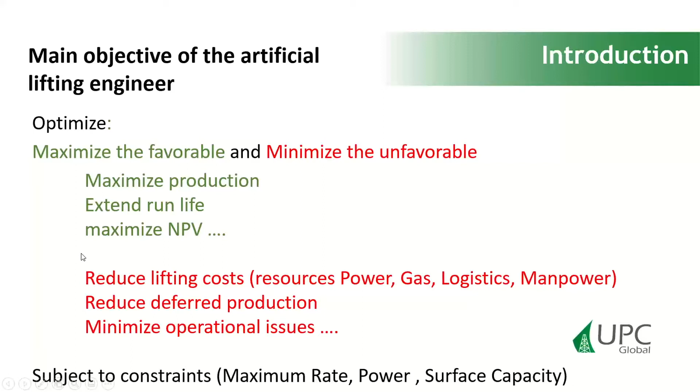If you talk about optimize with a person from drilling, the meaning for them is completely different. But here, what I want to highlight is that we want to maximize the good things and minimize the bad things. That means a lot of things. Sometimes we only think about production. That is valid, but please keep in mind that the definition can be extended for the better profit of the company.

So to achieve this optimization goal, we need to monitor the wells, and a monitoring program can be manual or automated. It doesn't matter. What you have to do is identify opportunities, detect anomalies in the lifting system or in the well or in the reservoir, quantify the performance of the lifting equipment, quantify the well or reservoir performance, and avoid operating in unsuitable conditions for the lifting system or the well or the reservoir, because that will reduce the life of the artificial lift system or the life of the reservoir. We need to identify and correct failures.

This list of activities, and maybe some others, you have to do in the field. It doesn't matter if it's automated or manual, this is what you have to do to achieve the optimization goal, to increase the good things and reduce the bad things.

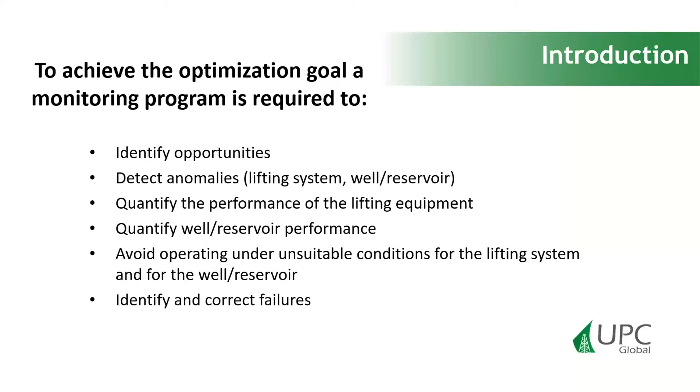So what should the surveillance program do? If we have a system, manual or automated, we have to monitor the artificial lift operations and the reservoir performance. We have to have fast operational actions. I mean, if we discover that we have to increase the pumping speed, or increase the injection gas rate, or shut in a well, whatever it is, these actions have to be performed very, very fast.

We have to determine the artificial lift run and off time, what we call the availability, the well availability. 90% of the time the well was producing, 10% it was offline. We need to do that.

We have to generate reports with key performance indicators, KPIs, and trend charts. That's important, of course. We have to store the artificial lift systems' run history. Sometimes it's not only the production history that's there, but we also need to know what was the sequence of artificial lift methods and the specification of the equipment that you have in the well.

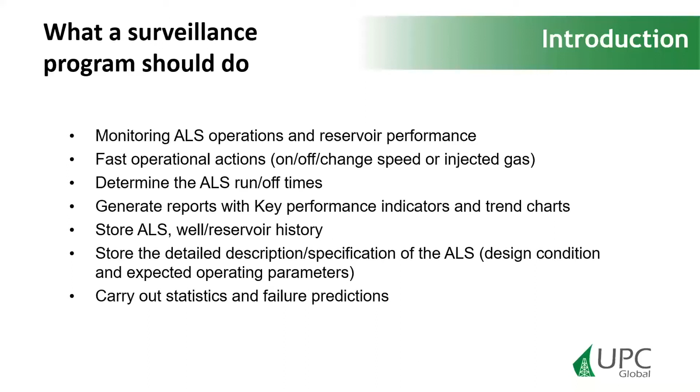Then I need to know what the expected operating parameters are for that equipment, for the design condition and for the current conditions. Otherwise I don't know. If I don't have that information, I'm not going to have any idea if the well is behaving as expected or not. And we have to carry out statistics and failure predictions. Especially failure statistics and failure predictions, which are very important. We are going to talk about this later on.

So when we acquire the data, some of it is automated and some is manual. In the field you are going to find a mixture, some values online through SCADA and some of them manual. You try to make the manual measurements as frequent as possible, and logistics is also involved in this.

For example, sometimes you have pressure and temperature at the wellhead online, but the production measurement, water, oil and gas, you have to measure in the test separator or in a tank, whatever. And you can only do this once a month because you have too many wells to test and only one facility. So you have to live with this condition, and you need to know how frequent each measurement is that you are taking.

So if the equipment is okay, after you do a troubleshooting, then you can optimize. It's possible if you have room to optimize. If the equipment is operating with problems, you have to diagnose what the problem is.

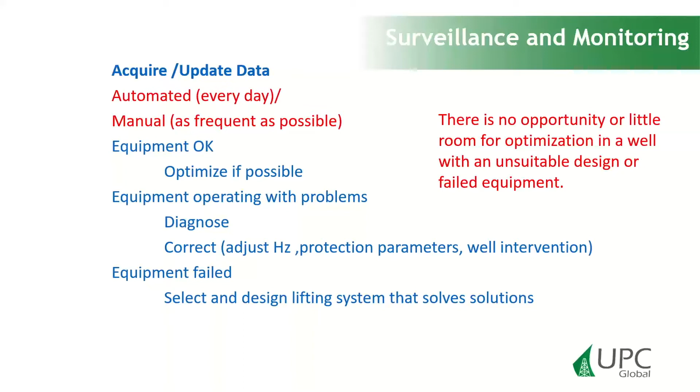Something important is that the more variables and the higher the acquisition frequency, the more anomalies, problems, and opportunities are detected, then uncertainty is reduced, because let me explain this.

If I'm only measuring the production or pressures once a month, and you measure on the first of each month, and suppose the failure occurs the next day, then after 29 days you are going to discover that you have not been producing for almost a month, even though you thought your well was available, but in reality it wasn't. You thought it was working, but it was not working.

But if I measure the production every week, or measure something else online, then I can detect these problems very fast and take action.

We have to know what an anomaly is, that it's not behaving as expected, and then I have to try to find what the problem is, or I can clearly see a problem, or it's working but I detect an opportunity. So probably the well is working, but I notice there is room to increase production. But I need to detect this and take action fast.

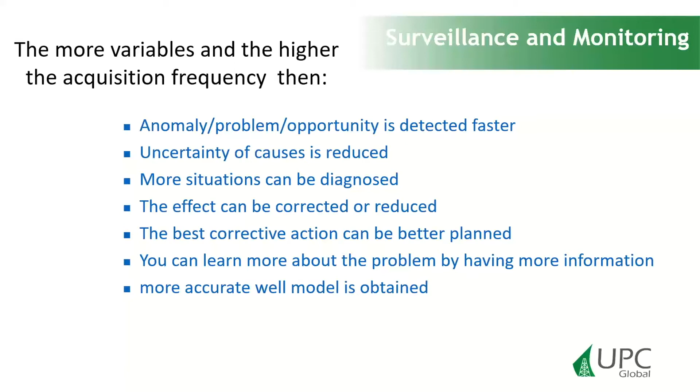Which variables are being measured and where? Some of them are measured at surface, some of them are measured at bottom hole.

The sampling frequency varies: it could be online like SCADA, daily such as water samples at the wellhead, weekly for fluid level, monthly for production, or annually for static reservoir pressure.

And then you have to indicate whether this value is a direct or inferred measurement. You need to know this, because sometimes you have a bottom hole fluid pressure because you have a downhole sensor, or sometimes you have a bottom hole pressure because you estimate it from the surface with a correlation, or from a fluid level with an echometer. It could be either.

So let's talk about the source of the variables that you are measuring at the surface. For systems that use pumps, we measure current, voltage, pump speed, and torque. For gas lift, you measure the gas that you are injecting. And even for all of them, sometimes you are injecting chemicals, so I need to know how much you are injecting. That is measured at the surface, and these are very important.

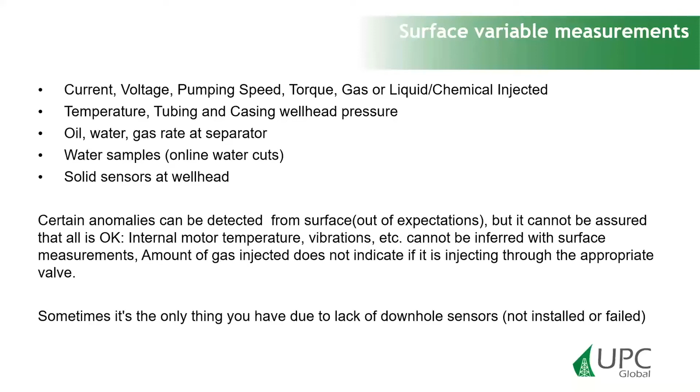Sometimes the only thing you have is surface data, because the downhole sensor is not installed or it failed. Then the only thing you have is this at the surface, and you have to try to do your best with it, okay?

For example, with the ESP, the current patterns and their behavior are fundamental for the diagnosis of the well. There are some patterns that people have classified - once you see them, you get an idea of what could be happening. These are in the API standard. So when they tell you what could be happening, pay attention to the patterns, not only the values but also the shape and behavior of the patterns, okay?

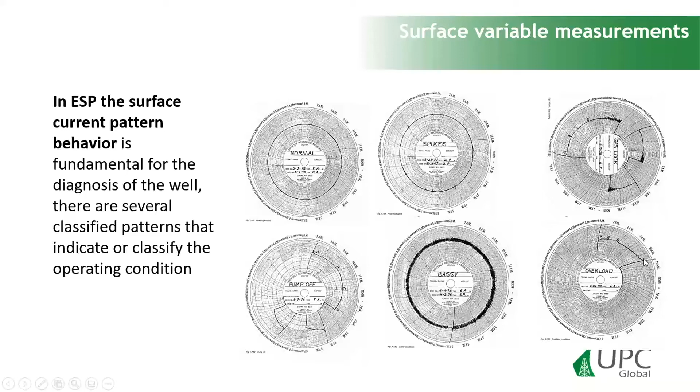You have some gas, and you see that it is very similar to the normal, but it has this small variation in the current. And the overload, you are going to see the current start going up. It's not as smooth, but it's going up. And then here the protection, high current protection, trips the well.

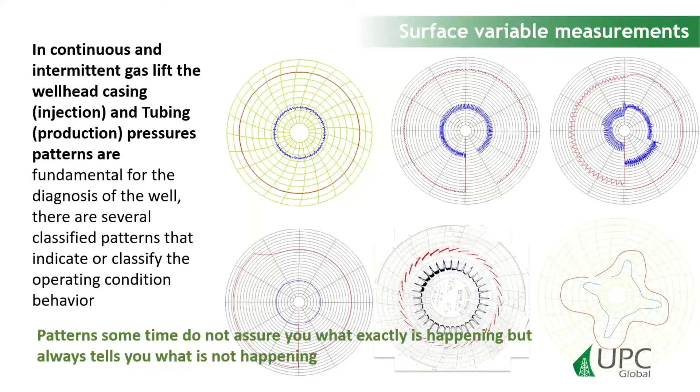Here you are going to see, I'm not sure where I'm injecting, but at least it's injecting in a steady state, and so on. So it's very important because you can discard states and conditions in the well and reduce the possible diagnosis in the well.

In PCP, the measure of torque and current on the surface is used for rod protection. If the torque exceeds this quantity, or the current, it's the same, because I know they are equivalent. You know the motor and the wellhead in the PCP, and you know motor current and torque, they are related. So the VSD, the variable speed driver, will give you the equivalent torque, and then you know the maximum torque that you can handle. So you use this for protection.

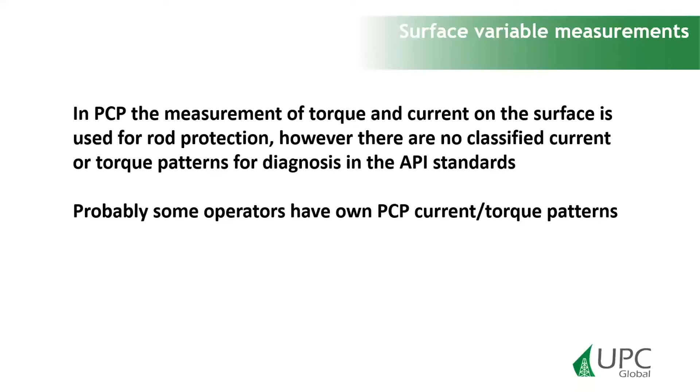However, there are no classified current or torque patterns for diagnosis in the API standard for PCP. Probably some operators have their own PCP current torque patterns to do diagnosis, but they are not reported in the PCP standards.

Let's talk about measurement from downhole and from the surface. When downhole sensors are unavailable, the acoustic log, Sonolog, or commonly known as the echometer, uses a gas gun with nitrogen or CO2 and a surface microphone to determine the depth of the liquid level in the casing annulus from the surface.

With the echometer gas gun, we can measure the static fluid level in the casing annulus or tubing. If your well has been shut in for some time, then we can measure the liquid level, and that will be the static fluid level. We can also measure the dynamic fluid level in the casing annulus for pumping methods.

For gas lift, we can measure the casing annulus level just to check if the well was properly unloaded, but it's not going to tell you it is injecting from where it's supposed to be.

We can estimate the static reservoir pressure, estimate the pump intake pressure and the bottom hole flowing pressure, estimate reservoir inflow performance, the well potential and current condition, locate the approximate depth of holes in the tubing or casing, and measure gas flow rate through the casing annulus in a gas lift well.

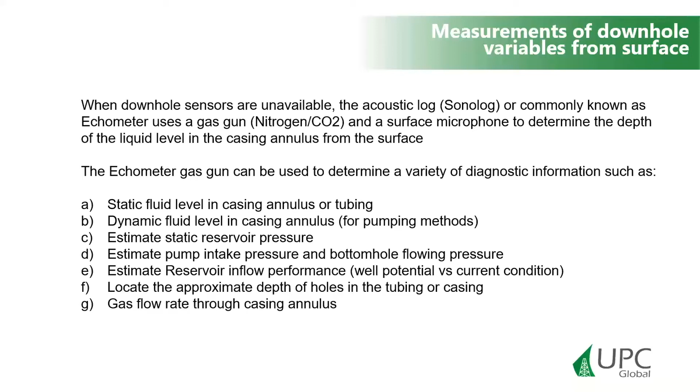For gas lift, I can perform a check on the valves that are above the liquid level, but I cannot see it when the well is flowing. I have to shut in the well, and then I can give you an idea what's happening with those valves above the liquid level, in both the tubing and the casing. If the valves are a problem, or you have a hole below the liquid level, I cannot tell you, I cannot see it. So with the pumping method, what you are going to do...

You make a shot with the gas gun, pressurized with CO2 or nitrogen, through the annulus. Then you measure the traveling time with the microphone, and by analyzing this pattern, you can deduct what is the liquid level. Then you know what is the submergence — how much liquid you have above the pump.

We can leave this permanently in the well, so you can take a fluid level reading anytime from the office. We can estimate the intake pressure at the pump, and we can estimate the bottom hole pressure at the perforations. We can use it for PCP, ESP, and sucker rod pumping, and we can check where you are injecting in the gas lift.

We can double check — what is the advantage of this? That you are going to use this when you don't have downhole sensors. And most importantly, you are not running any tool inside the well, so you don't have the risk of getting stuck with a fish with your tool. So that is very good.

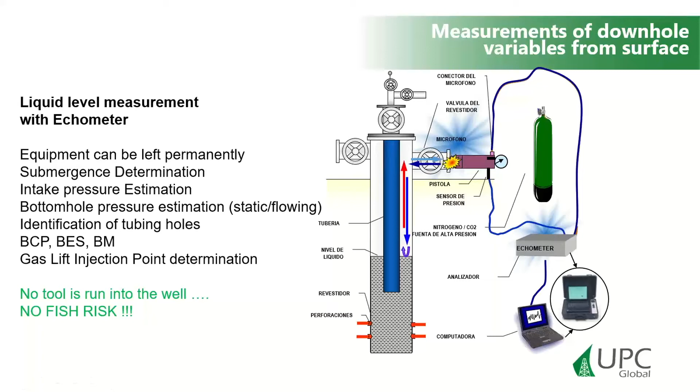Also, for sucker rod pumping, beam pumping, we can measure the dyna cards at the surface, and with this we can have a very good idea what's happening in the downhole pump, using this measurement and some math with the wave equation that describes the dynamics of the rod.

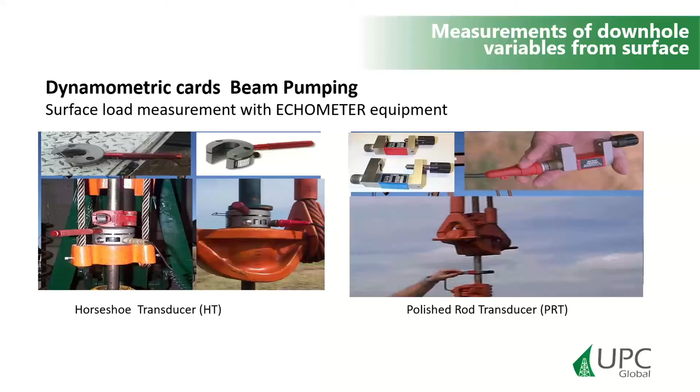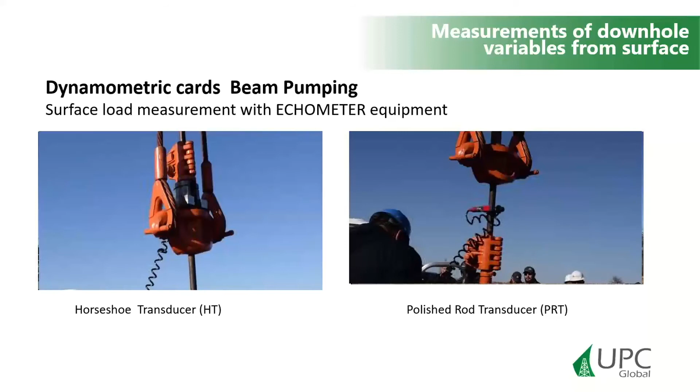We can do this from the surface using what we call a horseshoe cell or a polished rod transducer. With either of these two, we can measure the force that you are applying on the polished rod at any time. With this, we get what we call the dyna cards, and there are some well-defined patterns that have been studied for many years, so you can do a very good diagnosis of what's happening in your pump.

Artificial intelligence is an excellent tool for pattern recognition for all artificial lift systems. For this kind of task, recognizing a pattern, artificial intelligence is very good. Now I'm going to tell you about something else where artificial intelligence can be used in artificial lift systems.

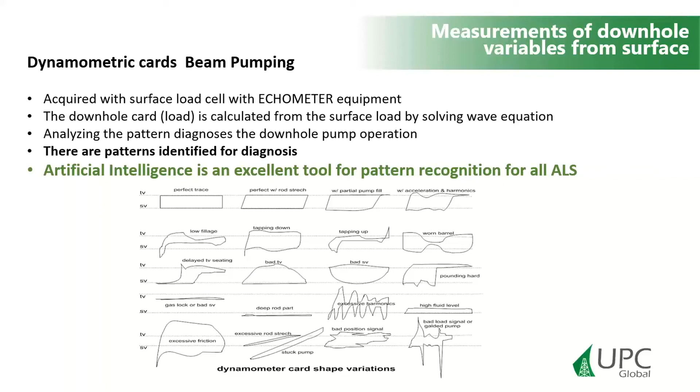When I have sensors downhole, they are very common in ESP and what we call ESPCP — ESPCP is basically a PCP with a downhole motor. They are very common because they use the same power cable for data transmission, and the additional cost is small compared with the completion. For example, an ESP completion with a workover could cost $300,000, and adding the sensor adds only about $20,000 more. You are going to see very important variables that extend the run life of the system. That's why they're very common nowadays.

They're not so common with other methods like sucker rod pumping, PCP with surface motors, gas lift, jet pump, or whatever — because you would require an additional cable to transmit the data, and the cost is not so small compared with the completion.

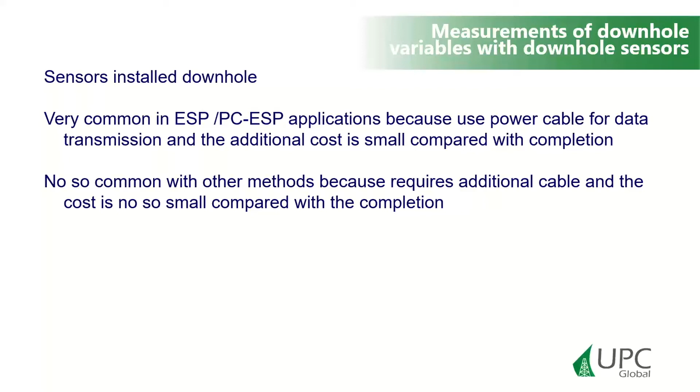Maybe the sensor and the completion, the sensor is $20,000, and the completion for a PCP is $80,000. It's very important that people always run this, because if you use the data properly, you can extend the run life, and that's going to add a lot of value for the company. The net present value is going to increase, even though you are spending more on data. But it's important that you install and use the information you're getting. Sometimes managers don't want it because they're just having another graph in the report, but not getting more information or using it. If you're not using the information to have a good idea about the reservoir and the artificial lift system, to extend the life of the well, then I understand why people don't want to use it. But when you use the information, you'll see it's the best investment you can have. Okay, let's talk about the pressure sensors downhole.

You have the pump intake pressure. You use this to protect the pump against the pump-off condition. By the way, you need to have this together with the surface casing pressure. For example, if your pump intake pressure is 1,000 psi, and you think you have liquid above the pump, take care: if your casing gas pressure in the annulus is also 1,000 psi, that means you have no liquid above the pump. So the pump intake pressure, together with the casing head pressure, is used to protect against the pump-off condition that is going to damage whatever pump you have there.

Also, this tells you where your low fluid level, your dynamic fluid level, is, so you can protect against it. The pump discharge pressure is used to protect your system against the subsurface safety valve being closed without you noticing, or someone accidentally closing the well at the wellhead, tubing clogging, or viscous oil plugging. You also use this for multi-phase flow correlation selection and tuning, to predict your well performance better. And you have the differential pressure, discharge minus intake pressure, to check burst pressure, which is very easy in big diameter pumps in ESP, and pressure load on the pump for PCP and ESP. You need to know if you're loading the pump too much.

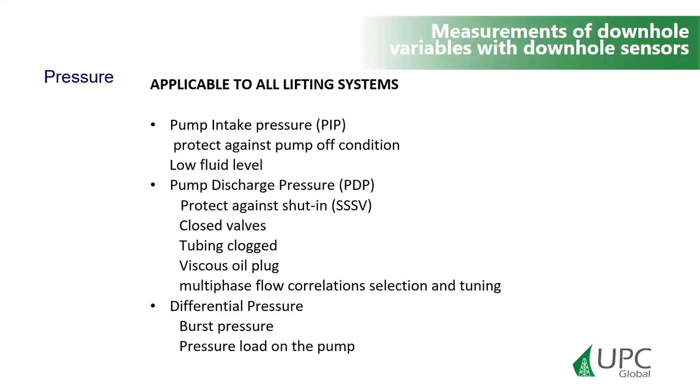You can have very high discharge pressure, 5,000 psi, but if your intake pressure is 4,900, the differential is very low, so the pump is not being loaded much by the differential pressure. So you have to be smart about this. Temperature is only for ESP. You have the motor winding temperature.

This is very important, and it's only for ESP, ESPCP. You use this temperature of the motor as an indicator of low flow, meaning you're not cooling down the motor properly. It's also an indicator of high load on the motor and any phenomenon that affects the motor, for example scales, carbonate scale, and low motor efficiency, which heat up the motor. The intake temperature is an indicator of recirculation. Maybe you have a hole somewhere and you're recirculating, because when the fluid passes through the pump, especially with too many stages, due to friction you're heating up the fluid as it passes through the pump. So a high intake temperature could be an indicator of this.

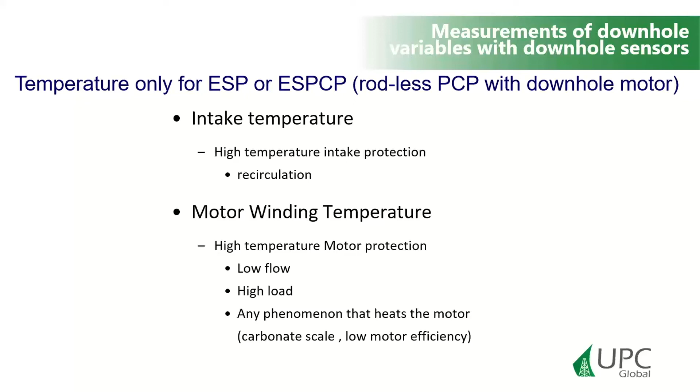Together with the motor winding temperature: if you have high intake temperature but low motor temperature, that means the fluid is cooling down properly. But if you have high intake temperature and also high winding temperature, then the interpretation is different. It's not easy.

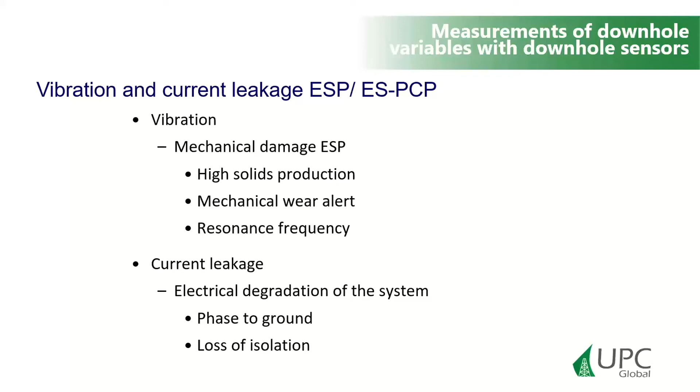Vibration and current leakage apply for ESP, or ES-PCP, whatever. The vibration measures or indicates mechanical damage. It could be high solids production - sand or other solids - mechanical wear, or resonance frequency, where you're operating at a frequency that's not good for your pump. There are some devices that measure current leakage. The current leakage is a measurement of electrical degradation of the system. It could mean you're very close to a fault to ground, or loss of insulation. It hasn't failed yet, but it's starting to have this problem.

In pumping methods we have to measure the free gas. The free gas has some effects. First of all, the gas uses space. For example, if you need to produce 2,000 barrels and you have 50% free gas, that means the pump capacity should be 4,000 barrels, because 50% is gas, so 2,000 of those are liquid. Regardless of ESP or PCP, the gas takes up space. Each method has its own free gas handling limit and different effects.

For ESP with a radial flow impeller, the limit is 10%. Once you reach that 10%, you're going to have a problem with this. Let me check this - ESP. Sorry about this, let me check it.

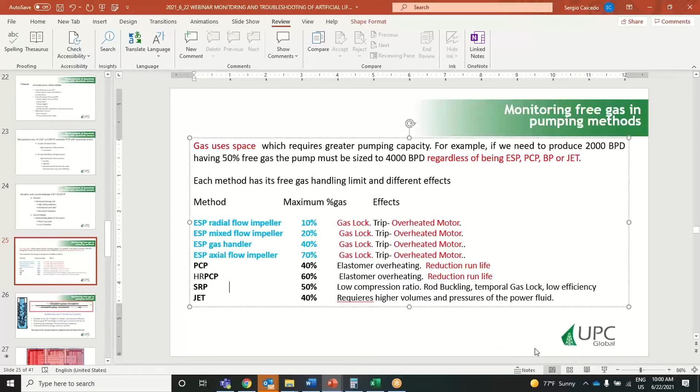For PCP, the problem is going to be that you overheat the elastomer and reduce run life. There is a special PCP called hydraulic regulated PCP that can handle up to 60. Once you reach that limit, you overheat the elastomer and reduce the run life.

In sucker rod pumping, you are going to affect the compression ratio, you are going to have rod buckling, a temporary gas lock, and low efficiency. In jet pumps, the products are going to require higher volumes and pressure of power fluid.

The free gas is the gas that is passing inside the pump. You have gas through the annulus, but the bubbles that pass through to the pump, that is the problem you are going to have.

The equation is very complex, but the most important thing to know is that it depends on the pump intake pressure, temperature of the intake, bubble point pressure, solution gas, percentage of water, and downhole gas separation efficiency. You need to know properly the PVT of your oil, and you need to know very well how the downhole gas separation works, since separation efficiency changes with each method.

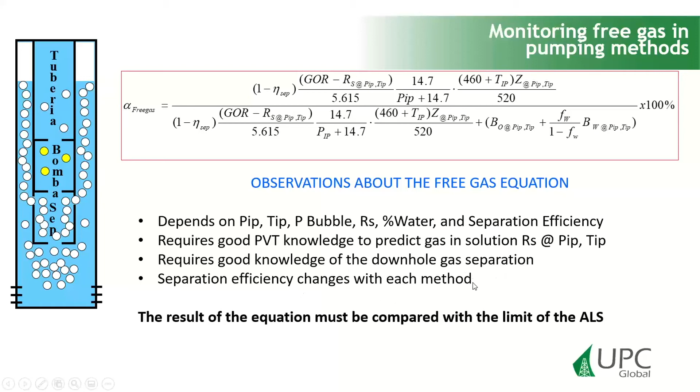So you need to know this. The result of the equation has to be compared with your limit. So I need to use that equation and then see what the limit is. Just to show you, it's not so simple.

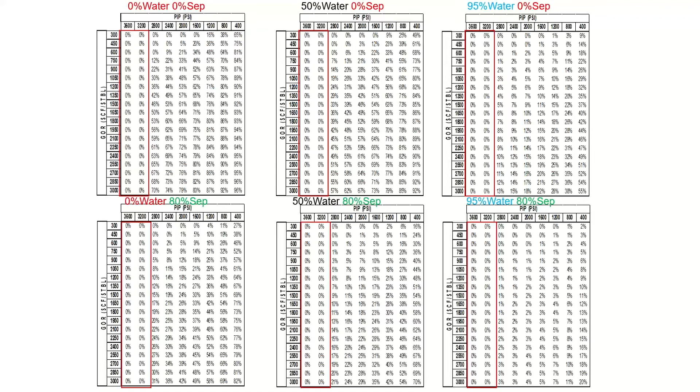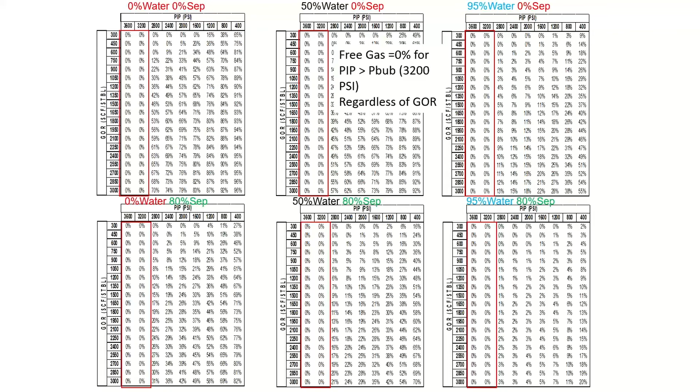If the intake pressure is above the bubble point pressure, that means you have zero gas because there are no bubbles, regardless of the GOR, even with 3,000 you have zero. In this area you are above the bubble point, so there is no gas because the intake pressure is very high.

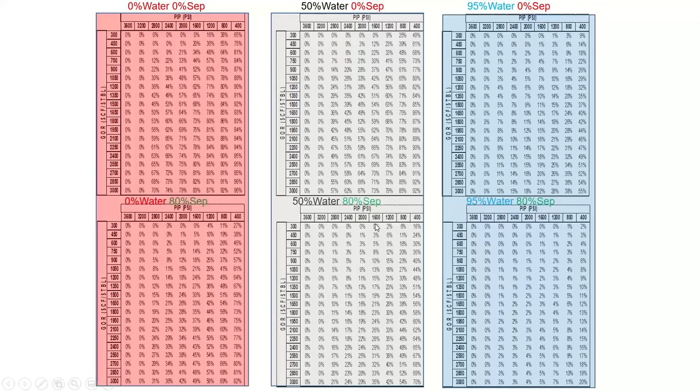If the water increases, the numbers decrease. So it's not the same to have, for example, 3,000 GOR with 400 PIP, that gives 96% free gas with no separation, versus with 95% water you get 55% free gas. This is an example of the equation for the different cases.

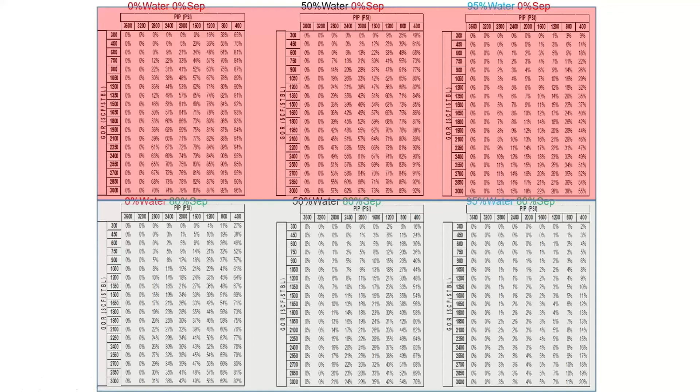Pay attention, here at the top is zero separation, and here 80%. So having 80% free gas without separation, and with 80% separation, it doesn't mean zero. You still have remaining gas, but still a lot less. So we need to use the numbers.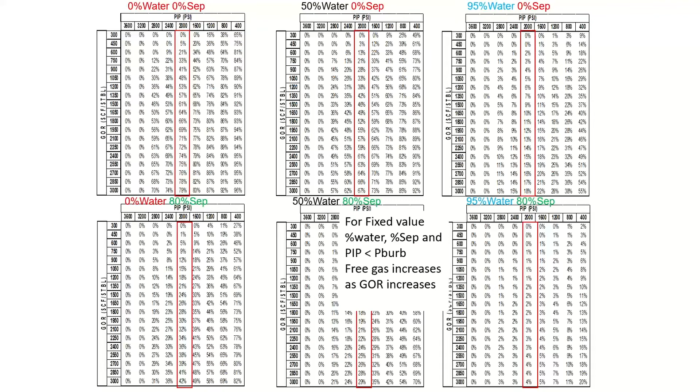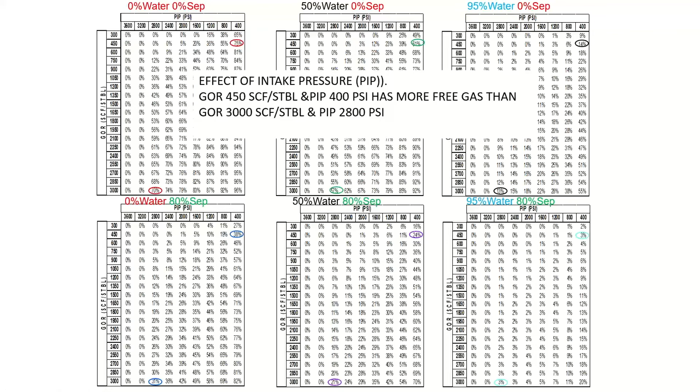When you have a fixed intake pressure, the higher the GOR, the higher the free gas, but that's only one parameter. Pay attention to the intake pressure: at 3,000 GOR with an intake pressure of 2,800 you get 70%, but a GOR of 450 with a 400 PSI intake pressure gives 75%. So take care, because sometimes low GOR but very low intake pressure creates a lot of free gas. So it's not only the GOR, it's the pressure you have at the intake of the pump.

Here I'm showing colors to visualize this. What you see here is what would happen at different rates with pumps at different depths. The continuous line, the pump is at 10,000 feet. The yellow line, the pump is at 9,000. The red is at 8,000. The green is at 7,000. The blue is at 6,000. And here I have one at 11,000, below perforation. The perforation is at 10,000, and you are going to see what happens. Black points mean less than 0 to 1% free gas, essentially no gas.

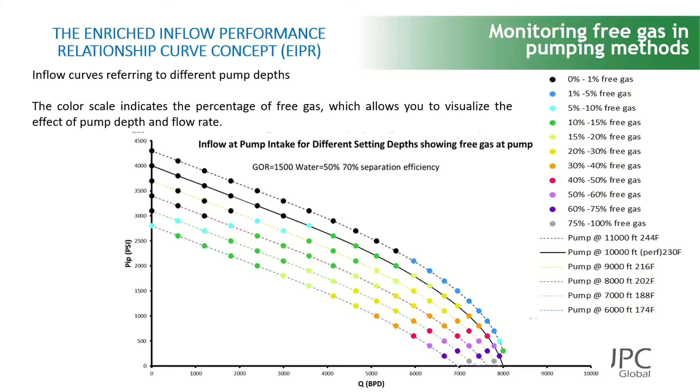This blue is 5 to 10, red is 40%, and so on. The position of your pump, which you need to know, and the intake pressure will tell you what is your free gas. So we can use the intake pressure to be sure how much gas you are having in your pump. This is a smart way to use your data to know how the situation at the pump is in terms of free gas.

When I combine the measurements with equipment specification, I get even more information. Direct measurements are usually used for alarms only, very low or very high current, very low or very high inlet pressure, and so on, compared with a fixed value for each well, which is a problem because someone had to pick that setting value. More information can be obtained when using a specification of this equipment, such as pump specification, motor specification, installation report, expected design and operation values.

Some indicators have acceptable accuracy, or have more errors, but show a clear trend. We can monitor the pump performance, and we can monitor the reservoir performance online. Measurement with equipment specification is better than artificial intelligence.

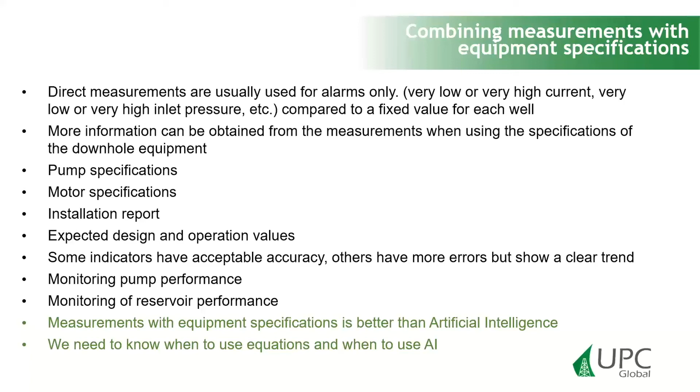Believe me, do not try. When you have a well-known equation or something, I do not recommend using artificial intelligence, because artificial intelligence needs a bunch of data to train the network, the neural network, I mean. And you are not going to know why it's taking a decision. If you don't have good training, then the intelligence is not going to be so smart. So use this for patterns. Do not use this for equations where you have a model. We need to know when to use an equation and when to use artificial intelligence.

I'm going to show you an ESP online flow estimation. If I have intake and discharge pressure sensors, this measurement can be used to calculate online oil and water at the downhole condition, and then from downhole conditions, I can take it to surface condition.

The idea is to use the pump performance curve as a virtual meter. It's necessary to know the model of the stage and the number of stages installed. It allows production online monitoring as well as quality control for validation of production tests. It also allows checking if the bottom hole flow through the pump is in range, which is important to extend the run life.

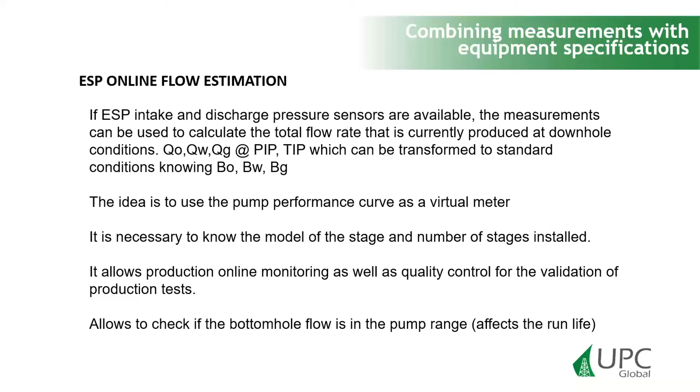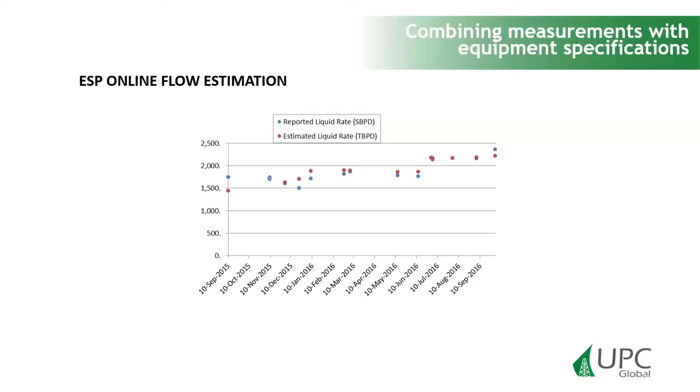Here I'm going to show you in red, these are real data. Pay attention to the dates. I calibrated only once, and I could estimate the rate for one year, just as a reference, the reported liquid rate versus the estimated. You can see that they are very good estimates, very, very good. There is a paper for this, for those who want to read. So I used the reported flows as a reference. Only one calibration point was used, okay, that is this one here.

PCP online flow estimation. When having intake pressure and discharge pressure with PCP, a similar ESP flow estimation can be applied, but the difficulty is that the performance specifications Q versus delta P change fast and drastically with the swelling of the elastomer. In a matter of two weeks, one month, you have a different pump, even if it's still new, because the elastomer swells with temperature.

Even a friend of mine, remember he told me he had one stator in Venezuela, a very hot place, and the stator almost got stuck because of the high temperature. It was in the sun. In the afternoon, in the evening, when the temperature decreased, he could pull the rod easily, but not when it was hot. So it swells a lot. BP.

So when I use the curves of the PCP from the manufacturer, they are not reliable because they are for water and for some specific temperature. So that's the problem for the PCP.

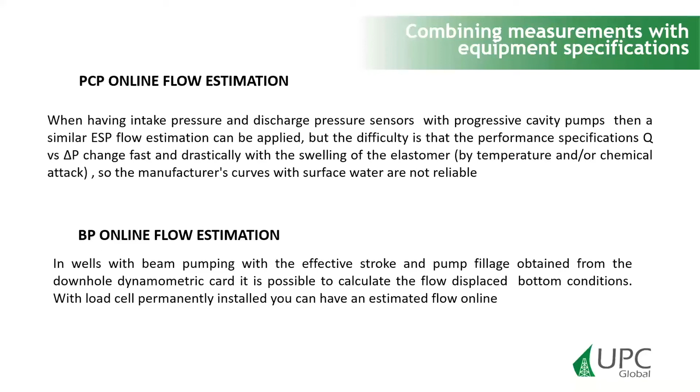Reservoir evaluation: if a pressure sensor is available at the pump intake or at the sand face, you can evaluate static pressure and flowing pressure, with additional calculation if the pump is not installed at the sand face. If the distance between the pump and sand is 500 feet, you need a multi-phase correlation to estimate conditions at the bottom. Then we can have the reservoir inflow curve. We can perform build-up and drawdown tests for permeability and damage determination.

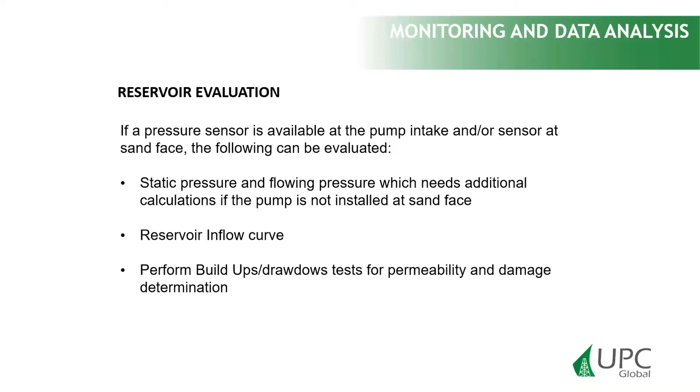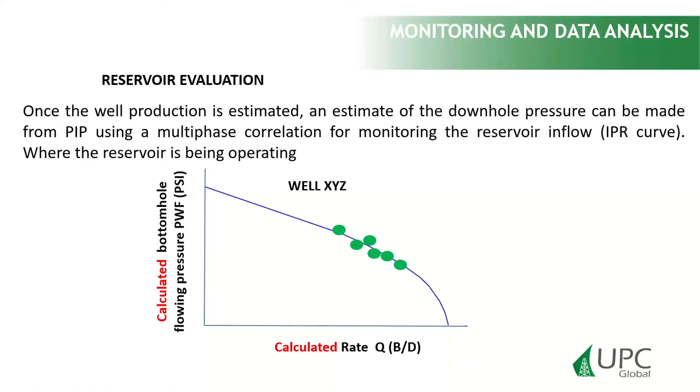Once well production is estimated, as I told you, I can estimate online if I have sensors. Then I can know what is happening with the inflow online, so I can have this curve, and you know if you are producing a very high percentage of your absolute open flow, or just a little bit of your reservoir capacity. That's why this is part of reservoir evaluation. You can also measure what should be the maximum production, the productivity index, that is the slope here in the flat part, and compare what I'm expecting with no skin damage and so on, or after a stimulation.

Equipment condition and evaluation: detecting the problem requires that you monitor the well, requiring additional information, design condition and operating condition, expected values. I'm expecting, in this ESP, that the current is 60 amperes, and I'm having 80, or I'm having 30, then it's not in the range and something is happening.

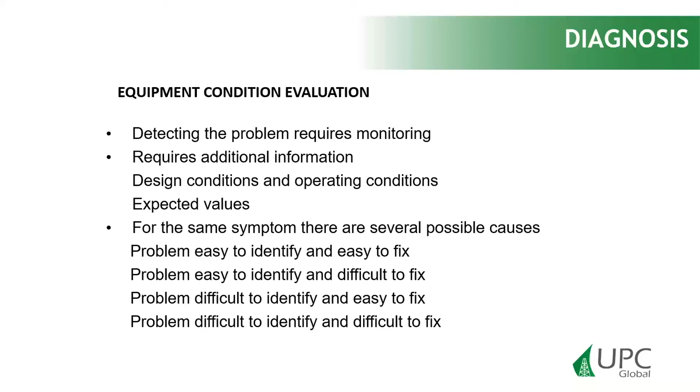Diagnosis is not simple, because for every symptom there are possible causes. It's not only one - that's the problem a doctor has when you arrive. There are many reasons you can have a stomachache, and you need to know what are the possible reasons. Diagnosis is not simple because there are problems easy to identify and easy to fix, problems easy to identify and difficult to fix, problems difficult to identify and easy to fix, and problems difficult to identify and difficult to fix. So diagnosis and troubleshooting is not an easy thing.

Inspection and maintenance: in production wells with artificial lift, it's only possible to do visual inspection and preventive maintenance on surface equipment. For PCP, sucker rod pumping, I can do something on the unit, and so on. But for other systems, especially ESP, at surface I have the VSD, valves, wellhead, but downhole I have motor, seal, separator, pump, cable, tubing. In beam pumping, I have the VSD and beam unit at the surface, and downhole the rods, the pump, the tubing. PCP is the same as beam pumping.

In gas lift, at the surface I have the compressor, lines, valves, control valves, injection valves, and downhole I have mandrels, gas lift valve, tubing, packers. In jet pump, the triplex pump and the separator skid are at the surface, and downhole I have the jet pump, the tubing, and the packer.

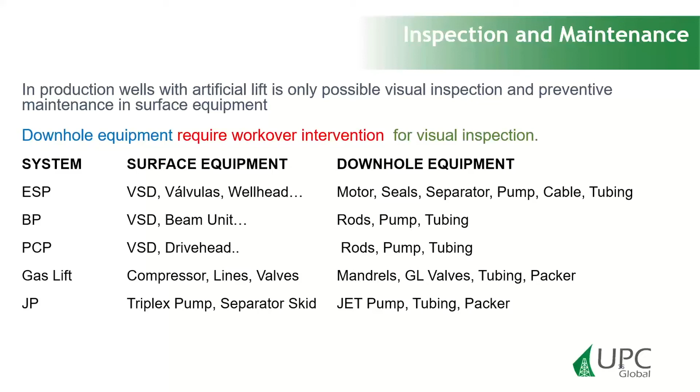So for downhole equipment, for visual inspection I need to do a workover, and that is the difficult part of artificial lift. The downhole equipment, you cannot perform a visual inspection while it's working. You can only do it after you pull the equipment from the well into the workshop.

Then, failure analysis and run life: what are the factors that make the run life shorter? Downhole temperature, motor, cable, and elastomers, fluid level in the pump, the intake pressure, number of trip interruptions. When you have an ESP and you are doing many interruptions, the seal, the shaft, the peak stress in the shaft, the rods - that creates problems and you are going to reduce the run life. Installation quality, cable, joints, penetrators, etc. Operating practices - if you are pumping out of the range of the ESP, if you are overloading or underloading the motor, the cable, or the surface unit, you are overloading the torque and creating problems.

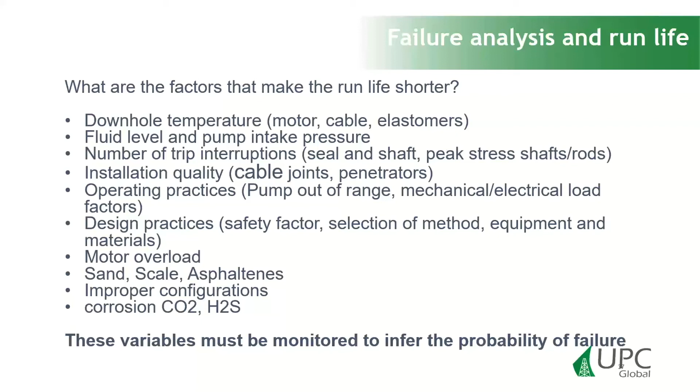Design practices - what is the safety factor? How was the selection of the method made? Is it the right method? The equipment size, sizing, and materials - that is very important. Motor overload, sand, scale, asphaltenes, improper configurations, corrosion, CO2, H2S - these variables must be monitored to infer the probability of failure.

Then, learning from the failures. That is also part of this: run life statistics, mean time to failure report,

and predictions. I highlight in red prediction. Report is the past. Everybody knows that the pump in well A failed, yes, but I need to know why, what happened, what was the root cause, and so on. And I need to do predictions.

Those wells that are not failed, they are not failed. And what's the prediction? They are going to fail. What's the probability of failure of that equipment in the next 3 months or in the next year? I need to do that prediction.

What is difficult in lotteries and horse racing is not the report. You are going to read that in the newspaper. What is difficult is the prediction. If you predict well, and you can do it also in Wall Street, you're going to be rich. What is difficult is the prediction.

That is the clue. Is it rational to do the same thing over and over again and expect different results? If you are not learning, not changing, not analyzing, you are a problem.

Corrective action in well operating with problems: improve operating condition, simple corrective actions on the surface. Sometimes you notice, oh, I'm running just a little bit out of the range of the pump. Let me reduce the speed, I'm going to be okay. Or the motor is overloaded or underloaded. In the ESP, I can downgrade the motor, changing the voltage and so on.

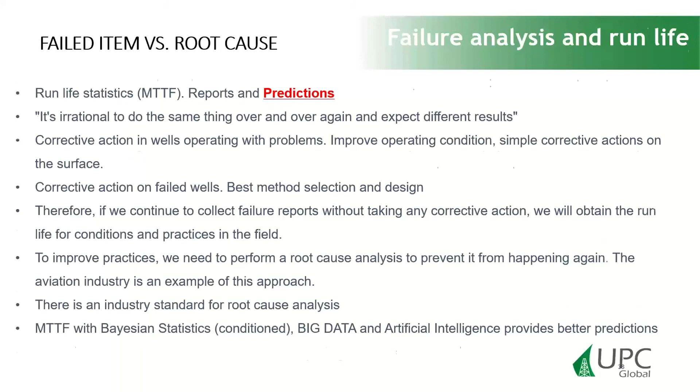Conclusion and recommendation: proper monitoring of wells with artificial lift is extremely important, as the run life and the performance are affected by inappropriate operation. ESP monitoring is even more relevant because it's expensive equipment which is very susceptible to damage due to poor operation design, besides the high production deferral associated.

Understanding the existing monitoring variables, the purpose, the interpretation, and scope is critical for artificial lift evaluation to ensure proper operation. Deep understanding of artificial lift system equipment and working principles is essential for proper monitoring.

I cannot go and just take data. If the guy does not understand the system, that's essential. Surveillance involves much more than acquiring values and a dashboard with alarms.

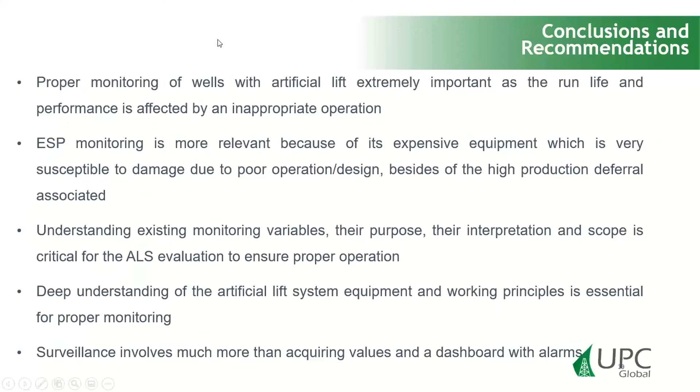The problem I mentioned is not only that you are going to acquire the data, but what are you going to do with this data? Sometimes people don't see any additional value because they are not doing too much with the data. As I showed you in one slide, let's think about this chart, okay?

You are going to know what's really your production, which is very useful because you can see which wells are producing. It's very difficult, when all your wells are working and your production decreases, to find where the production loss is. There are some easy cases where you find the pump is off, that's simple. But when the pump is working and you have low production, that's not easy to find. Having online production estimation is a very good use of these measurements.

So they are of value. But if you're not doing anything with it, not estimating rates, just having a display of the pressure, I understand that some people don't see the added value.